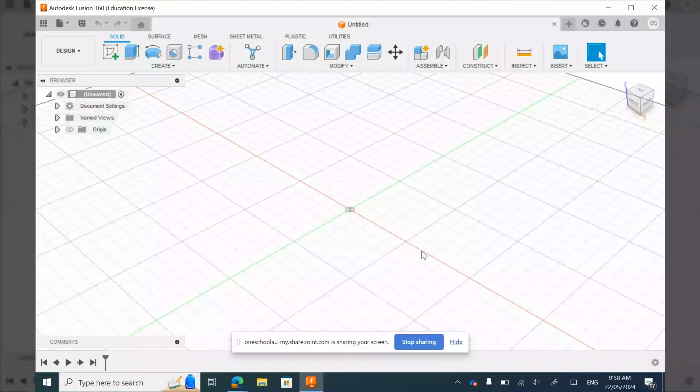Welcome to our nut, bolt and washer assembly tutorial using Fusion 360. We're going to start with part one, which is creating a hex nut.

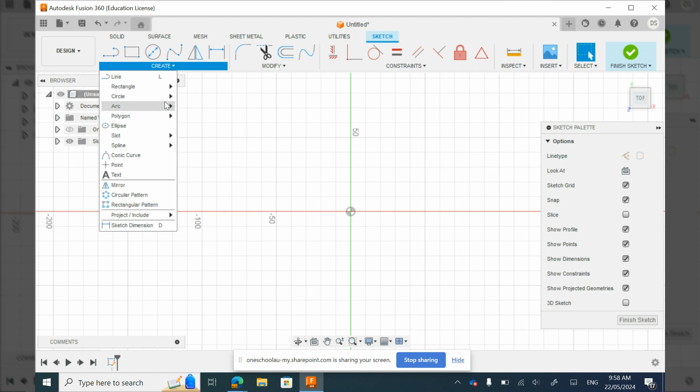To start with, we're going to create a new sketch. We're going to choose the top plane and create a polygon, and we'll just choose this center point here. We'll make that 10 millimeters and make sure we've got 6 sides. When we've done that, I want to select this top edge here and use the vertical horizontal constraint to align that. Once done, finish sketch.

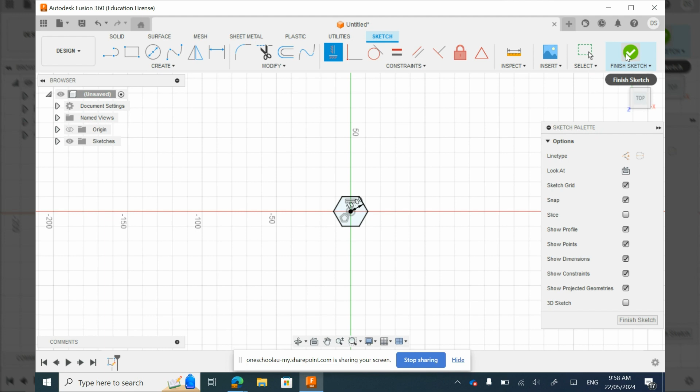We zoom in and extrude that 10 millimeters up, which gives us the basis of our hex nut. At this point, I'm just going to save and call this hex nut assembly. It's important that we save as we go in case we lose anything.

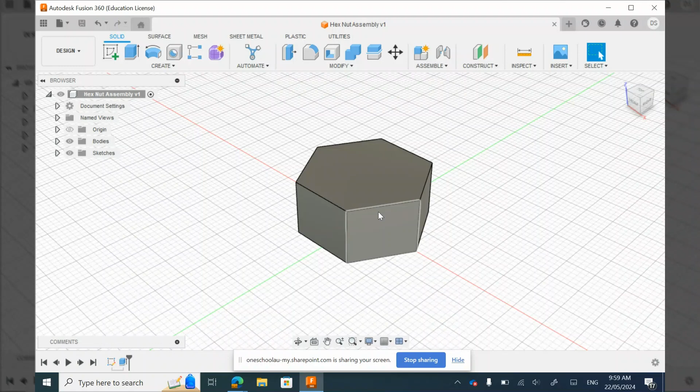Next part here is we're going to create our edge. So there's a couple of things we've got to do. The first thing is we're going to select our origin and the XZ axis. I'm going to create a new sketch on this face, and I'm going to project on here.

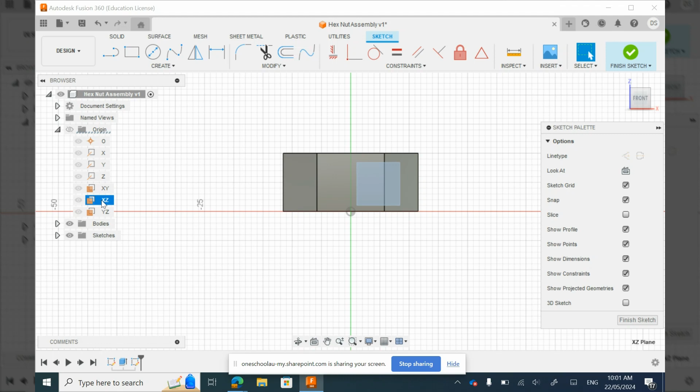We've got a little red line, a little red circle on that edge. We're going to create a projection point there. It should turn purple, and then you have a purple circle here. From there, we're going to create a triangle from that point.

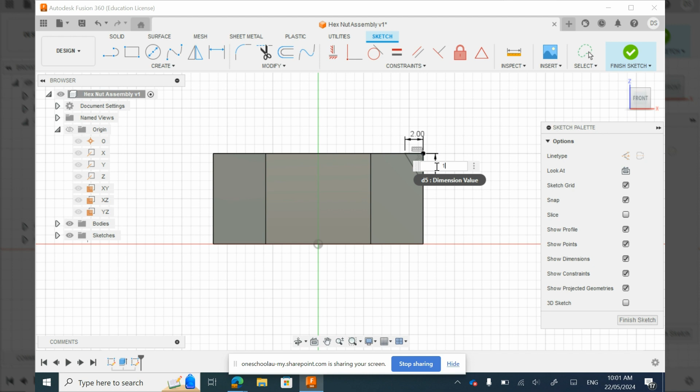Don't worry about the dimensions just yet. Once you've done that, you can hit the D key, and we're going to select this edge here. We're going to make that 2 millimeters, hit enter, and we're going to make this edge 1.5 for that one.

So hopefully now, if we finish that and turn this body off here, we can see what we've just created. I'm going to select that now and then turn the body back on, and you can see how that's coming into that top edge.

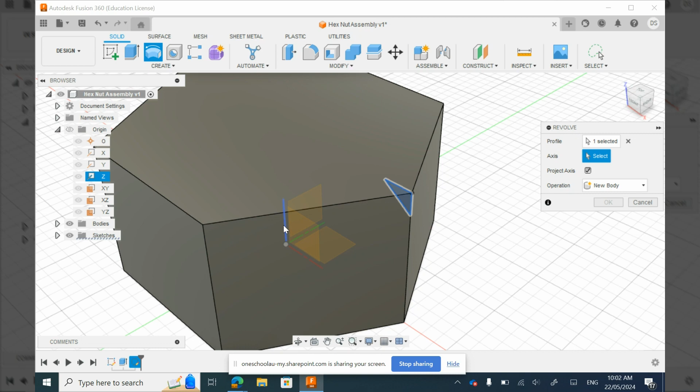I'm going to use the revolve feature here and select the vertical, the Z axis here. You can see that blue line. If we select that, it shows a revolve around that edge, so we want a full revolve all the way around, and we make sure our operation is cut. Once that's selected, hit OK, and that's created that top edge of our hex nut.

That can be good for some nuts. We're going to mirror that though on the bottom side, but before we do, we're going to create our hole.

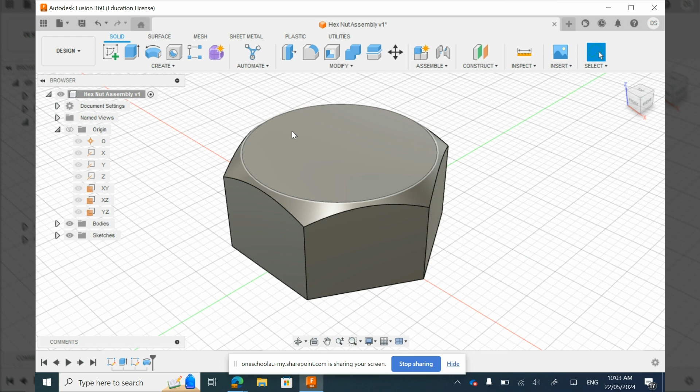If we select hole, we're going to select our face, and we're going to create this hole on it. If we just use our mouse, we can pick that up and snap it to the center point here. A couple of things we're going to do: when it says extents, we're going to go all, so that's going to go all the way through.

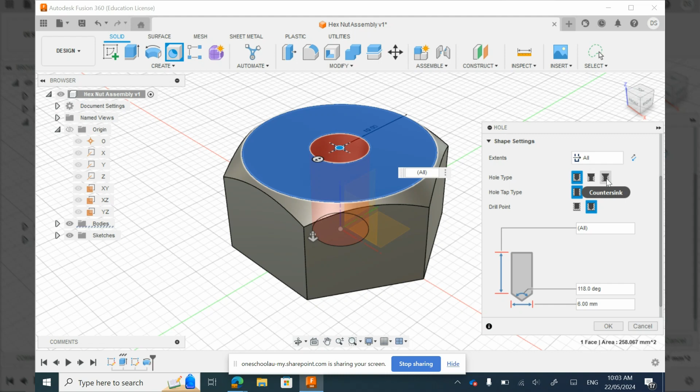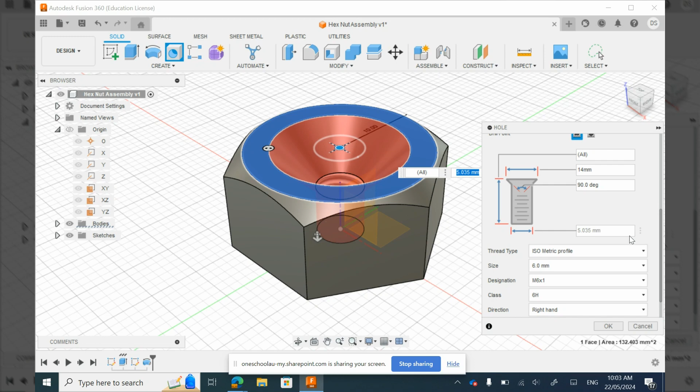We're going to use a countersink, so for countersink we're going to say tapped, full here, and for angle, no, we're going to go flat. For the top of the countersink, we're going to say 14 millimeters, and for size, we're going to change that to 12, then our designation, 12 times 1.

Make sure that is in the ISO metric profile, and for right hand, I'm going to change that to left hand, and we're going to model that. Hopefully now that should come out. Right, so 14 millimeters, size should have been 12, 12 times 1 - so you've got the 14 up there.

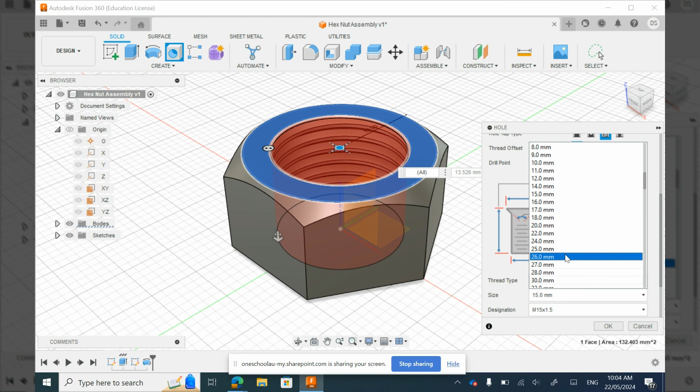ISO metric profile, 12 millimeters, 12 times 1, 6H which is the default, and left hand, and that should be modeled. I don't know what happened. Okay, when that's all done, hit OK, and we have our thread and our countersink and that top edge.

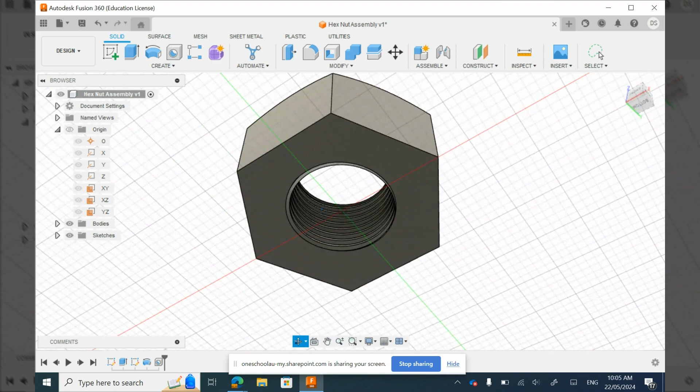What we're going to do now is mirror what we've just created onto the bottom of our hex nut. Hex nuts can look like that, but we're going to use the mirror feature to match the geometry on the top side to the bottom.

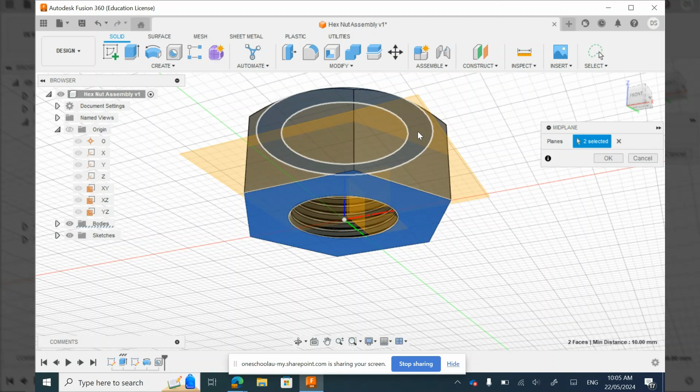Firstly for that, we need to construct a midplane. So go to construct midplane, and we're going to select our faces - the top one here, we want the middle point between the top and bottom face. We can see, between our top and bottom faces, we have our midplane.

Once that's selected and it comes up like that, select OK. And we've now got our construction - you can see construction over here. We've got our midplane. What we want to do now is mirror our features that we've created on that top edge.

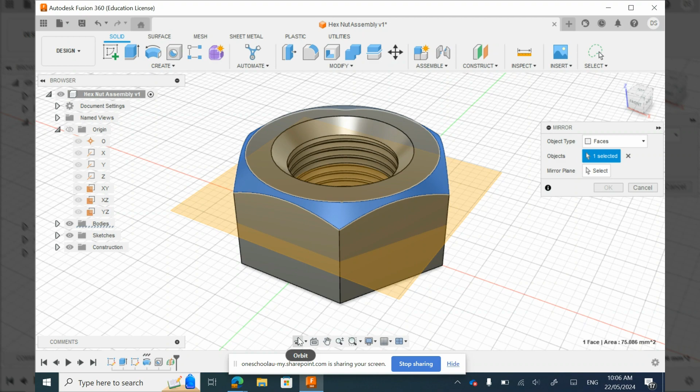Select create, mirror, and then we're not going to select bodies, we're going to select faces. So we're going to select this outer face that we've used the revolve feature on, and then select the inner countersink. Then let's select the mirror plane, our midway point, our midplane. If we preview that, we should see what's going to happen on the bottom.

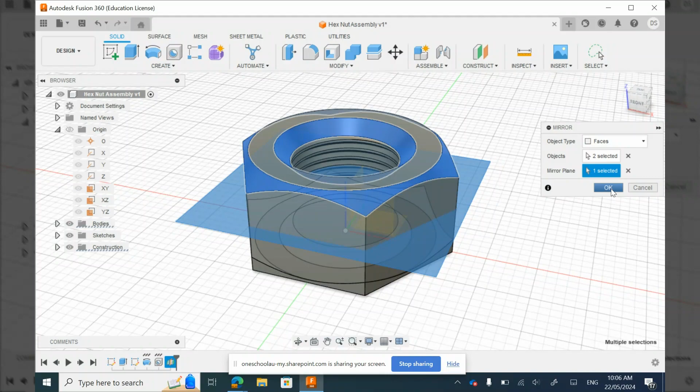Yep, that's good, hit OK. And then we have our completed hex nut. So I just turned off the construction midplane there. If we look again, we've got the same geometry on the top and bottom.

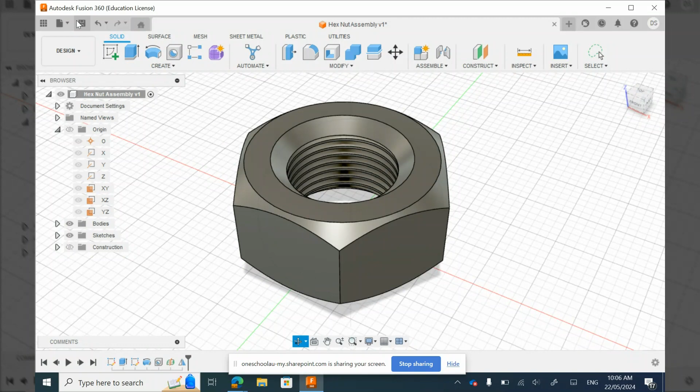Excellent. Once you've done that, select save again - just save, OK. And we're also going to label our body, so we're going to call that 10mm hex nut. Excellent, that is part 1 complete.